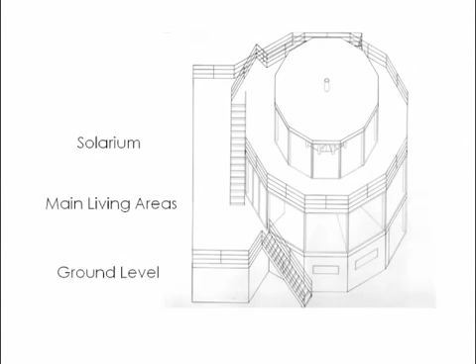Well, Fred Keck built the House of Tomorrow as one of these, and one of the unique features of it was that he, instead of being an exhibitor, meaning it was free when you were already in the fair, worked out a concession where you had to pay 10 cents to get into this. Now think of the options of the fairgoers walking down the midway. There's the big GM exhibit stretching a couple hundred yards ahead. You're walking through these model homes, you poke into one or two.

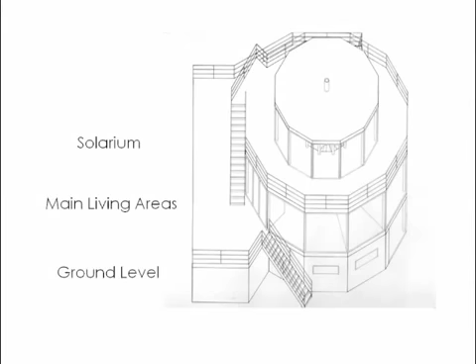The very last one on the left, although in kind of a nice position, right with the lake. I mean, you see the porch sections here of these three levels. From the east edge of the porch, the lake is 50 feet away. It was quite a nice situation. So there's the ground level, there's the main living areas, the solarium, but as you saw from the earlier slide, this was a glass house. One of the features to make it a house of tomorrow in Fred's futuristic mind was to have an airplane.

Again, 1933. In January, when Fred first did his first drawings for the house, there were 40,000 people in soup lines and bread lines in Chicago every day. And on a January day when he was designing this building, if you had people 4 or 5 abreast right out here at LaSalle and Hubbard, the line would have stretched to the lake.

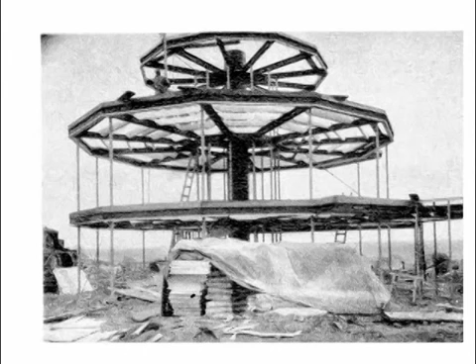But the House of Tomorrow, you can't see it too on this picture. There's the Pierce Arrow, the car that was donated, and he had a car donated because, I can't get into all the architectural features here because I'm talking about the roots of Passive House, but he wanted people to think of the future. He didn't really expect that people would, after the fair, ask him to build one of these houses. It's a duodecahedron. It means it's got 12 sides.

But you see from this picture of it under construction, steel framed houses, I mean, they'd been around in the construction industry for decades. This particular piece wasn't that unique. He was trying to design something that would catch people's attention because he knew from the earlier applicants that they were building brick, wood. Although there were some innovative builders who were doing some interesting prefab stuff. Howard Fisher, for example. There was a steel house that would bolt together without a frame because the rigid steel wall sections gave it the rigidity.

Now, a question. So you put up a steel structure like this on the lake. You enclose it all in glass. From the 2012 perspective of Passive House, what's going to happen to that in May and June? It's going to overheat. Yeah. And it did. The house was air conditioned. Part of the pitch, there was a nice little booklet that was handed out for your 10 cents. Part of the pitch was that it was completely air conditioned, and there was clean and filtered air that was circulated through the house every half hour.

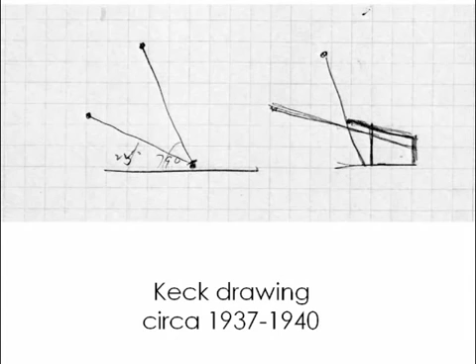Now he did other things too. He designed different types of radiant heating with massive floors, sometimes clay tile. He built some flat roof buildings where he floated an inch of water in order to have evaporative cooling in the summer. I think he first tried that in central Missouri.

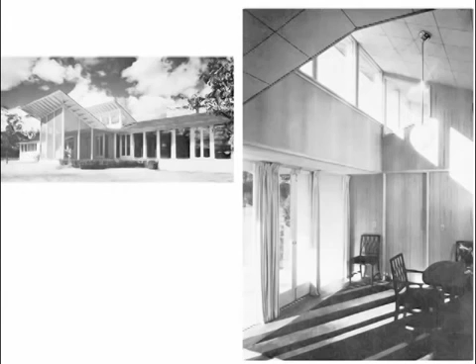So by 1940, he designed for Howard Todd Sloan, an old friend of his, this house in Glenview. And you see these unusual eaves. Some people have speculated that Fred Keck was trying to make a real dramatic architectural statement. That's why he made these eaves so strong and dynamic. And on the right, you see inside a picture of how the clerestory light falls.

And when the house opened, September 21st, this was a headline in the real estate section of the Chicago Sunday Tribune. And this is apparently where the moniker, the name Solar House, was first used, and certainly when you look at American architecture after 1940, this is where it became common and popularized, and then it blossomed into quite a mass market, mass publication phenomenon. People talked about solar homes. People built solar homes, including Fred, who continued to.

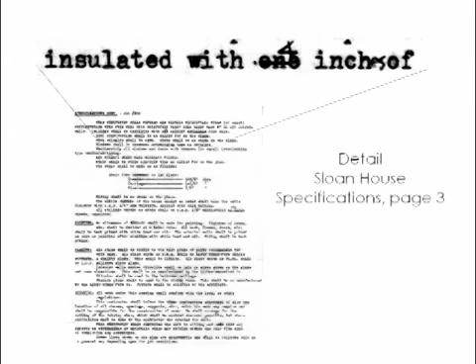Now, I'm not expecting you to read these specifications here. I put this tiny piece of the specifications for the Sloan House, page 3, and highlighted this one section. In the original typed form, and these were individually typed, nothing mimeographed, typed in carbon copies, you see that 1 inch of insulation has been penciled in to change to 4.

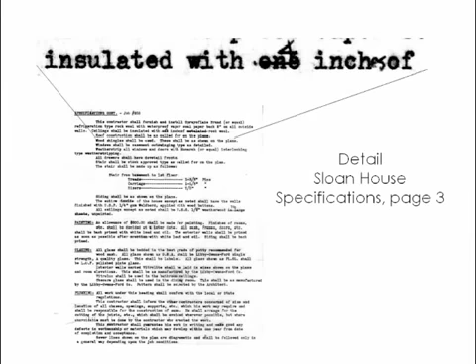Now, when I've looked at houses Fred was designing in this era of the late 30s, early 40s, 1 inch, 2 inches of insulation in the ceilings were about normal. But for the solar house, at some point, and I don't know if he did this the week before it started building or he thought about it later and penciled it in 2 months after the house was built, he specifies 4 inches of insulation for his first home that is called the solar home.

Here's the Sloan House in 2010, still in Glenview, still with that beautiful clerestory. It's been updated and modified a little bit, but according to the Glenview Historical Society, it would qualify for preservation on a number of terms because, one of the key parts here, it's been in the family since it was built in 1940. Different members of the family have lived in it, but it stayed that way.

The next jump, just a year later, is the Duncan House in Flossmoor, Illinois, another suburb. He's done some refinements here. He put in a much more massive floor because he was trying to deal with the lag of having massive heat when the sun is bright and beating down in the winter, coming in through all this glass. But if you have an absorber mechanism, in other words, this massive concrete floor, and he had pipes in it where he would run hot water for the auxiliary heating, the idea was to absorb that heat, and then it would re-radiate when the sun was down or when you needed the heat. There were short time periods. It wasn't going to last for days and days.

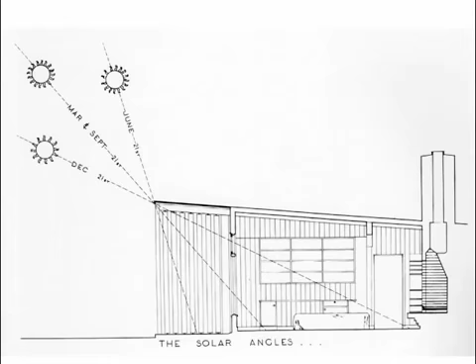One of his innovations to try to ameliorate some of the heat problems was to put in these adjustable vanes. He put in 6 of them across the front of the house. And I think the idea here was that when the sun was not at that peak on June 21st, but had started to tilt around, it would come in under the overhang. The adjustable vanes you could adjust to block some of the light from getting into the house through the windows.

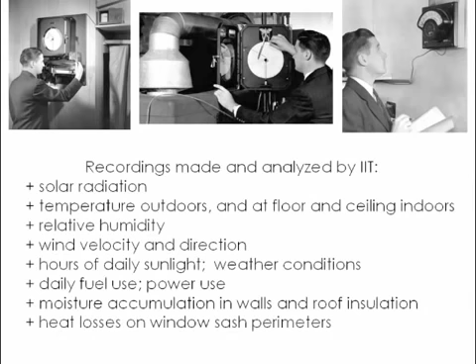Now, the results were mixed. The dates that they were recording were October 1941 to October 1942. Well, what was the state of things in the U.S. in late 1941? The war was about to start, and the war had been going on. Millions were in conflict in Europe and in Asia since the late 30s. The U.S. by 1939, 1940 was mobilizing, and getting prime building materials was not all that easy.

So when they got this building built, they got all the glass, but some of the lumber apparently wasn't sufficiently dry. The house was finished sometime in September. They started monitoring the middle of October. In the course even of that first winter, cracks developed, cracks that you could see through. Now, why someone didn't go there with a caulk gun perplexes me, but they also reported that it overheated.

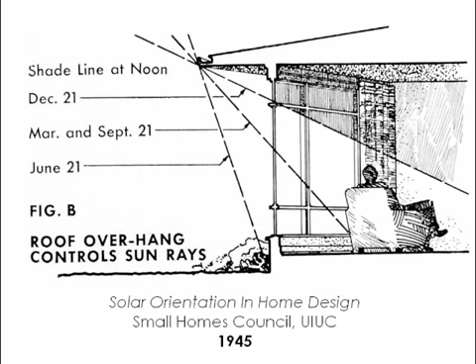And in it, you have right out of Keck, right out of Architectural Forum, the same shade diagram. And there's Mina Duncan sitting there reading her magazine with her back to us. Or maybe that's Hugh. He's come in out of the cold. He's tired of shoveling snow.

Solar became very current, and then it didn't, then it drifted a little bit. People weren't building solar homes. Fred Keck's an architect. He's got a style. I'm picking on Fred because he's a key part of the story here, but you can look at other architects that had picked up solar, following their own research, their own experimentation, as well as things they read in magazines, talked about at conferences. But it didn't take off besides this kind of boomlet.

Fred himself, as a practicing architect, the client has a lot to say about your design. And if they didn't want a solar house, they didn't want windows on that side. Well, look, the site is here. The lake is on the north. I want windows on the north. That's just one example. So back to 1976, back to the Small Homes Council.

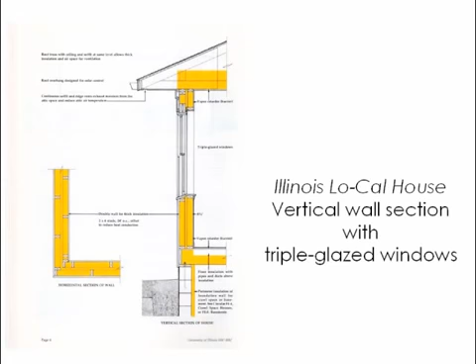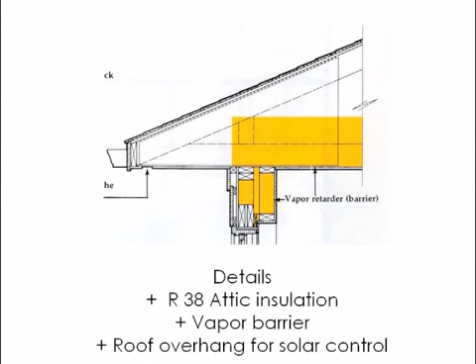diagrams. Here's the wall section with triple glazed windows now in 1976, and the top section, R38 attic insulation, a vapor barrier, and you see the roof overhang for solar control right out of the Keck style diagrams of 1940, 1941, 1945. The details of the double wall.

Now this, in being asked about it, this is what Wayne thought was the real key to the innovation, these double walls, where you could get up to R33 insulation, the vapor barrier, and by having offset studs on 24-inch centers, you would reduce some of the heat conduction.

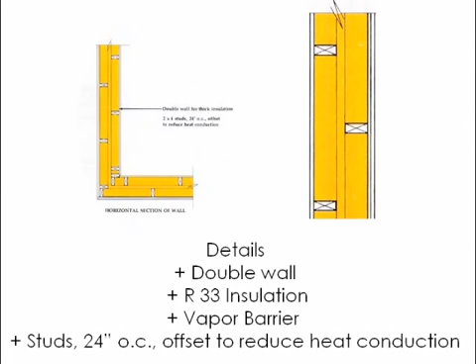Now, I'm not going to get into this today, but there was the famous Leger house. A lot of Canadians, especially around Saskatchewan, were really looking carefully into thermal bridges and how unexpectedly you would lose massive amounts of heat by just having a warm surface in contact with a cold surface, even though you looked like you had R33 insulation. How's heat going to get through that? Well, okay. But that's ahead of the story a little bit. Then the floor insulation, where you put it below the pipes and ducts and have R10 inside the foundation wall.

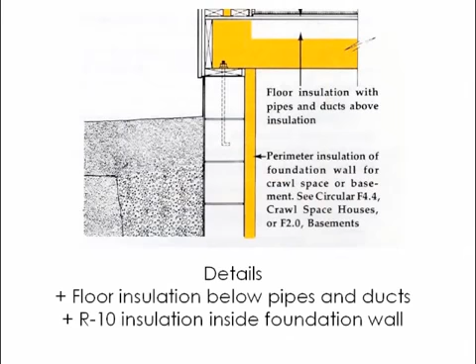You see a little bit of fine print here. This was one key publication, but they came out with circulars every couple of weeks on a vast range of small homes issues. They had one on crawl spaces, one on basements, one on storm windows. Yeah, they were doing a lot of things.

Yeah, that was still a big part of this. They've got much more massive insulation than what they say is the standard of the time. Another odd thing about this is that they published the Lo-Cal house in 1976 based on two years of computer simulations.

They went to the feds to try to get money to build this, I guess from very early on. They were dealing with a great reservoir of building science knowledge and knowing about building performance. The U of I, Champaign-Urbana, had been building test residences, and I don't mean a little 8 by 8 foot module with a little hip roof on it.

6-8 room houses that people lived in since the mid-20s. They'd been testing insulation, different types of heating systems. They tried cooling it with ice for a couple of summers with big blower fans. By this period, 1976, they had built up a tremendous reservoir of test knowledge about how buildings performed in Midwest weather, but they couldn't get the money to build an actual test house.

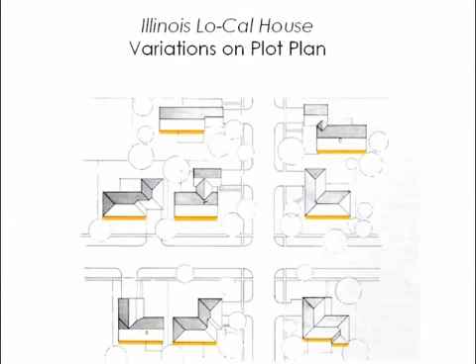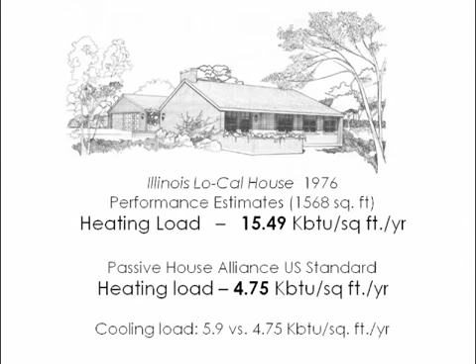Mark thankfully rescued me by helping me out with some heating load calculations of the passive house standard. In their published speculation about how this building would perform with X amount of insulation, with types of siding, with direct gain through a triple glazed window, the heating load was 15.49 kilo BTUs per square foot per year for a 1,568 square foot house.

Mark ran the calculations on Passive House Alliance US standards, and it's 4.75 for the heating load - a significant difference. But the cooling load, interestingly, on the bottom line here, is 5.9 versus 4.75. It's pretty close, yeah. Right.

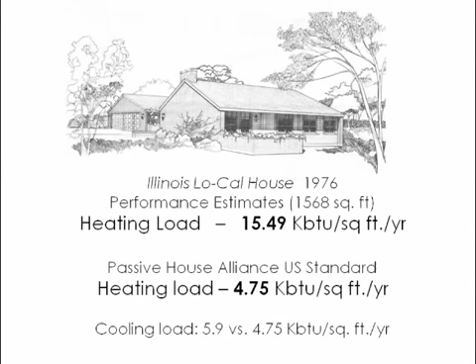Now, I don't know if he's online today, but Mike McCulley, who was already an experienced builder, and by this time, I think the late 70s, had enrolled as a student at the U of I - knew Schick, knew Konzo, knew Rudy Jones, knew Harris.

Well, he was a builder, so he built one of these houses on spec. Now, he did get some test money through the state of Illinois and I think through the feds - maybe it was federal money channeled through the states. And they monitored a Lo-Cal house built more or less to the specifications of the computer simulation. And here were the results.

The fiberglass and foam walls performed well. The cellulose ceiling insulation underperformed - there was settling and high measured conductivity. The natural gas furnace grossly underperformed in a steady state and worse in transient conditions. It wasn't a good match between need and load, between the load and the furnace itself. The duct work in unheated spaces was problematic. There was need for reliable ventilation strategies.

We're going to get more about that in the next section. And the passive orientation - overheating.

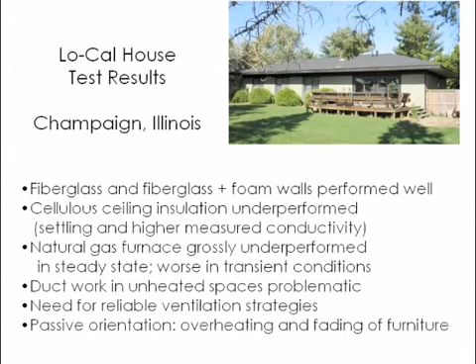The Saskatchewan group were really great leaders in this area. I don't have time to cover it today, but there were a lot of experiments in the late 70s and early 80s around solar.

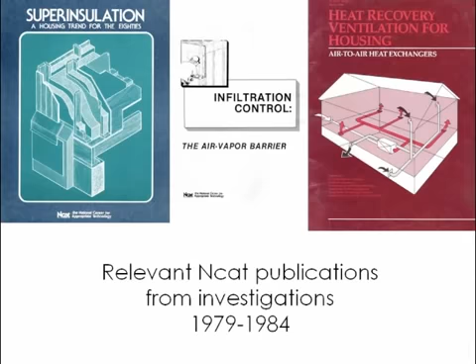R values? R values and U values are inverses. I don't know where it originated, but Tony Denzer might be able to supply this, or someone else — but I know that in Fred's calculations, they were calculating insulation by R value and heat loss through windows by U value.

Yeah, that they were based in Butte — NCAT was based in Butte. A lot of the folks used standards from that climate. But on the other hand, there was a national network. There were all kinds of institutions, including the big research labs, who were getting money and getting very interested in this.

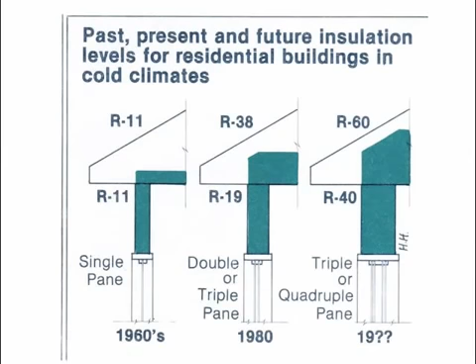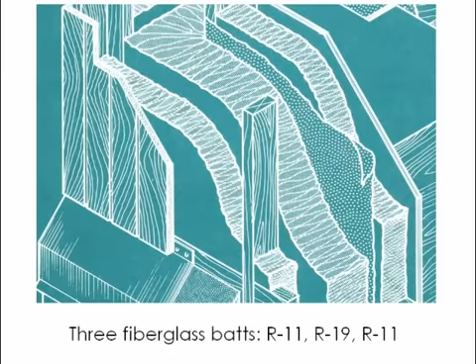They were quite a player in this too, but more a little bit later. So the standards for wall, three fiberglass batts, R11, R19, R11, stacked up like that. The foundation insulation exterior, R20 to R30, pretty substantial. But then when you talk about the northern Rocky Mountains, that's what, 7,500, 8,000 degree days.

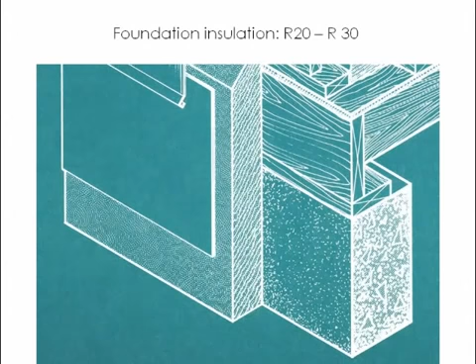That's a rigorous climate. The next one of the other key publications, infiltration control, the air vapor barrier. They said conventional practice depends on air leaks to get adequate ventilation. You want to have air changes, but this is one of the trade-offs about a real tight house. The continuous air vapor barrier, though, is necessary for effective super insulation, and HRV systems would provide interior air quality

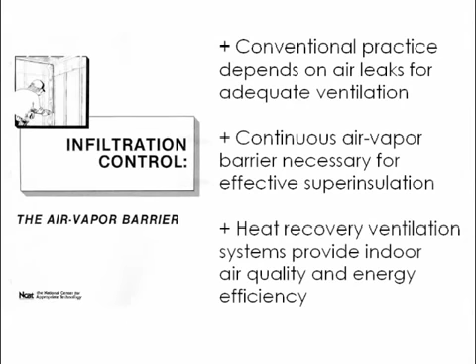and energy efficiency. I draw your attention to this little figure of the guy in the upper left-hand corner. Here's one of the NCAT trainees with his caulk gun. He's got a two-tone baseball cap and hair down over his neck, and he's wearing a sweatshirt, and he's got his caulk gun.

I heard just this morning from a friend of mine, Dan Hagan, that this was called the invisible hose method, because for untrained weatherization crews, as they were being trained, one of the tools, the insights that the trainer had was, okay, you've got this crack, and imagine you've got an imaginary hose, and you're squeezing the trigger and you're filling the caulk. It's like you're filling this crack with your imaginary hose.

So the air quality standards, let's say there's a general understanding, an agreement on that. The other three, there are a lot of claims, there are a lot of systems, there's a lot of good work, but standards, consumer information.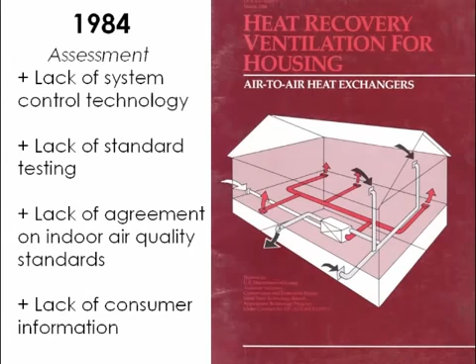So furthermore, just a couple of things to wrap up in the last minute or two. Questions, of course, are still, the floor is open, we're welcome. So what if in 1984 one of these caulkers got into a time machine and went back to 1941 and caulked the cracks in that Duncan house? Imagine how that IIT test would have been different.

Now, two books that I want to recommend: Solar House, Pioneering Sustainable Design by Anthony Denzer, out from Rizzoli in just a few months, and then Let It Shine. It says Pioneering Sustainable Design -- he's basically dealing with four or five decades in the middle of the 20th century. That's the domain he's chosen. By contrast, the 6,000-year story of solar energy, Let It Shine, this is John Perlin. I don't know if he has a publication date yet, but it's coming.